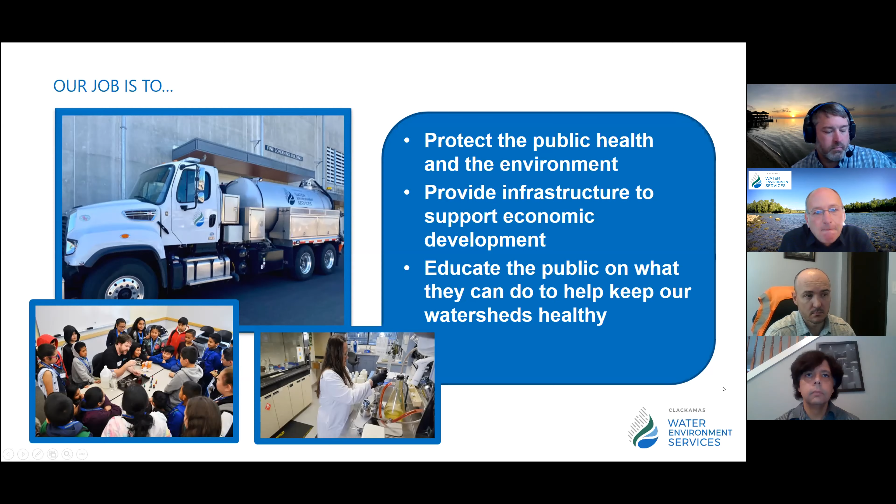The other cities that we serve, Milwaukie, West Linn, Oregon City, Gladstone, also own and operate those sewer pipes within their city boundaries. Combined, they own and operate over 400 miles of those underground sewage pipes, in addition to WES's 340 miles. Jeff is going to explain the significance of those many hundreds of miles of pipes for this project.

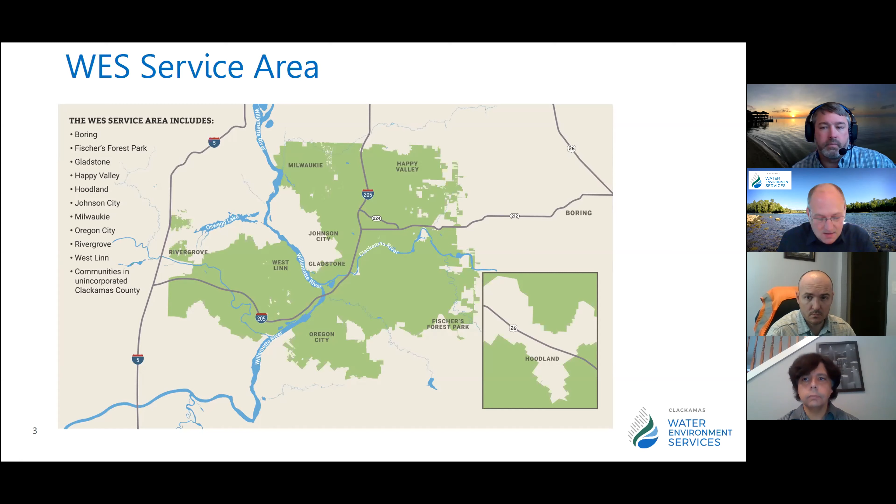Now I'd like to transition to really the main reason we're holding this open house. WES is asking for an easement to build a new effluent pipeline beneath Jon Storm Park in Oregon City. The Oregon City Charter requires a vote of the people in order to grant easements that are unrelated to park use. Our current outfall is nearing capacity during peak wet weather events in the wintertime. Our projections show that we need additional capacity by 2025, and that this project, if approved, will provide the needed capacity through the year 2080.

To be clear, an outfall is where our treated water enters the river. Outfalls are required to be designed to meet state and federal water quality standards for swimming, fishing, and aquatic resources. The proposed project, which is currently estimated at $21.5 million, would be funded as part of WES's current approved capital improvement plan. WES has the funding for this project. The proposed ballot measure, if passed, would not increase taxes. WES is asking for an easement to put an outfall pipeline under Jon Storm Park.

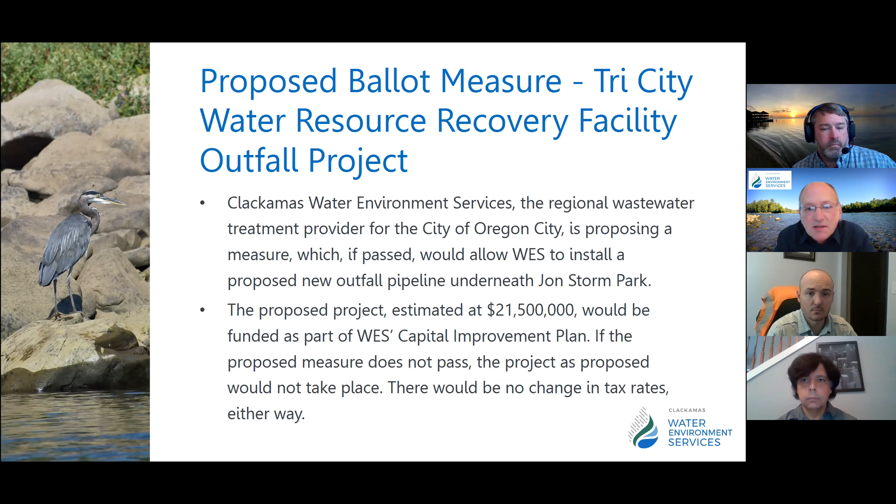If the proposed measure passes, WES will construct the outfall pipeline and restore Jon Storm Park to its original condition, and do park improvements recommended by the Oregon City Parks and Recreation Advisory Committee, a tree inventory, and mitigation of some hazardous trees. Any additional funding would be used for master planning for both Jon Storm and Clackamette parks.

If the proposed ballot measure doesn't pass, the project as proposed would not take place. Either way, tax rates would not change. And with that, I will hand it off to Jeff Stoller.

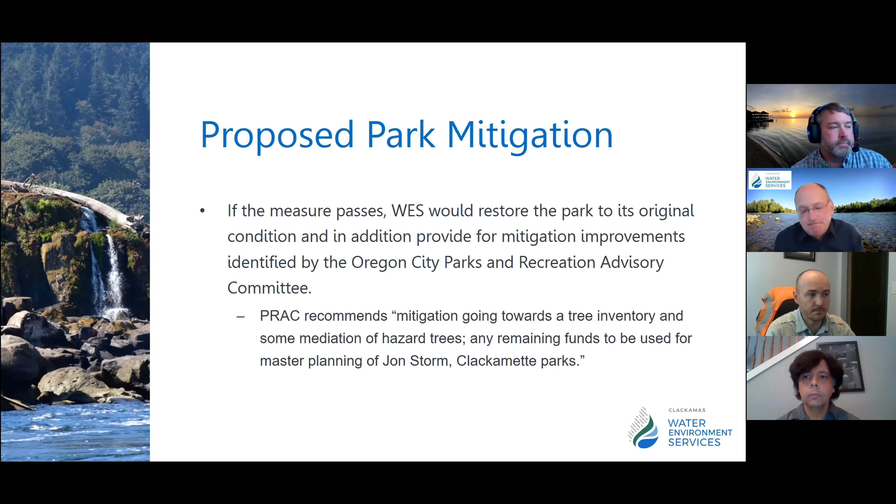Thank you, Greg. A little bit of background here on how we determined the need for the outfall.

In January of 2019, Clackamas Water Environment Services completed a sanitary sewer master planning project. The goal was to provide the district with a 20-year capital plan that outlines when and how we need to expand and maintain our sanitary sewer collection system to continue providing sewer service to our ratepayers.

To complete the master plan, the district placed flow meters throughout the collection system to obtain real flow data through an entire wet winter season. This data was then used to build a model to predict how future rain events will impact flows in the collection system.

I'd like to clarify that WES's collection system is a separate system, where sanitary sewers and storm sewers are not generally connected together. However, rainfall does have a big impact on flow in our system.

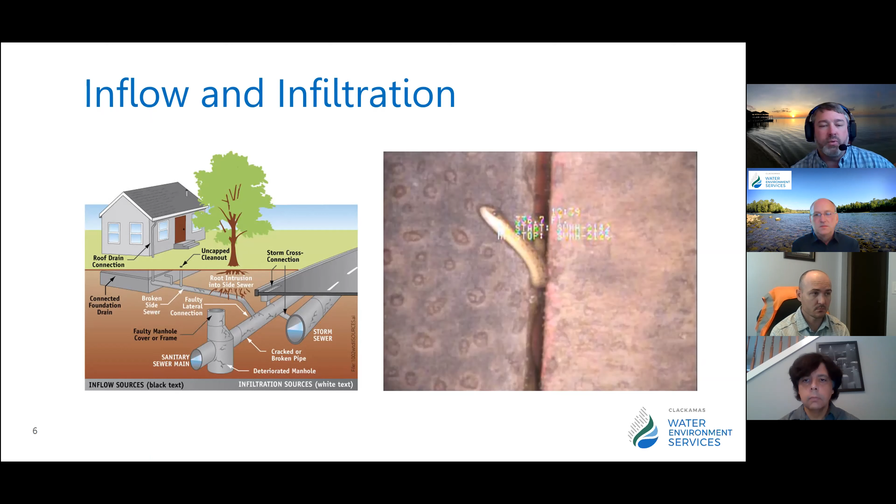Since WES is required to treat any water conveyed to our plants, preventing water from getting into our collection systems means less water we have to treat at our plants, which is beneficial.

During the collection system master planning project, an analysis was conducted to determine if it was more cost effective to just convey and treat all of that inflow and infiltration, or to make investments addressing the basins with significant inflow and infiltration to reduce them. The results showed it would save more than $200 million to make targeted investments in our collection system to address the inflow and infiltration.

All of the flow projections used for sizing our proposed outfall, as well as any future planning for the wastewater treatment facility, assume that WES and our member cities are successful in reducing the inflow and infiltration in these red basins.

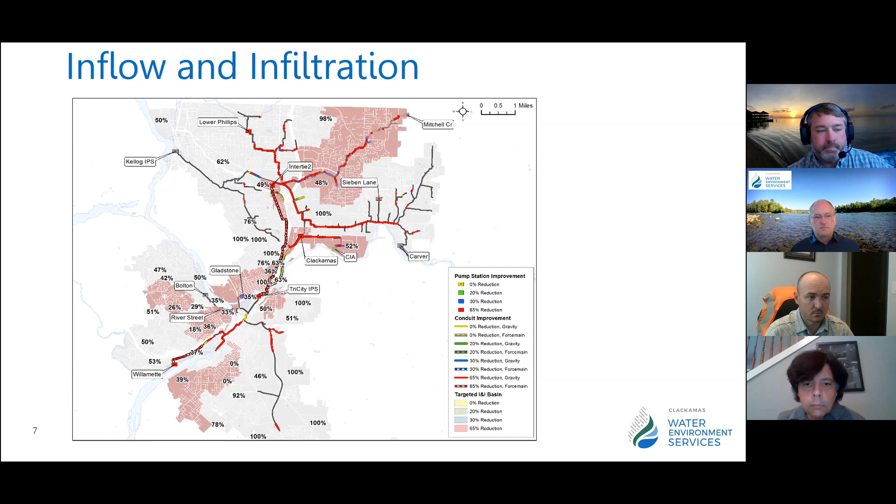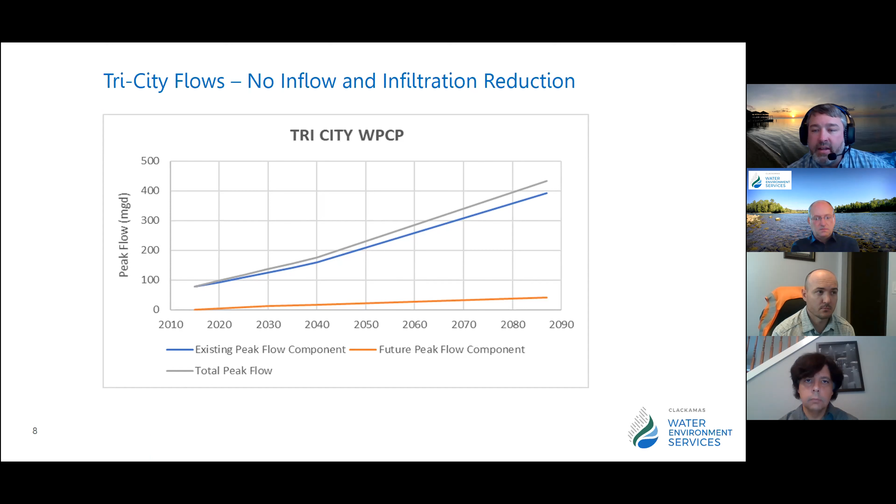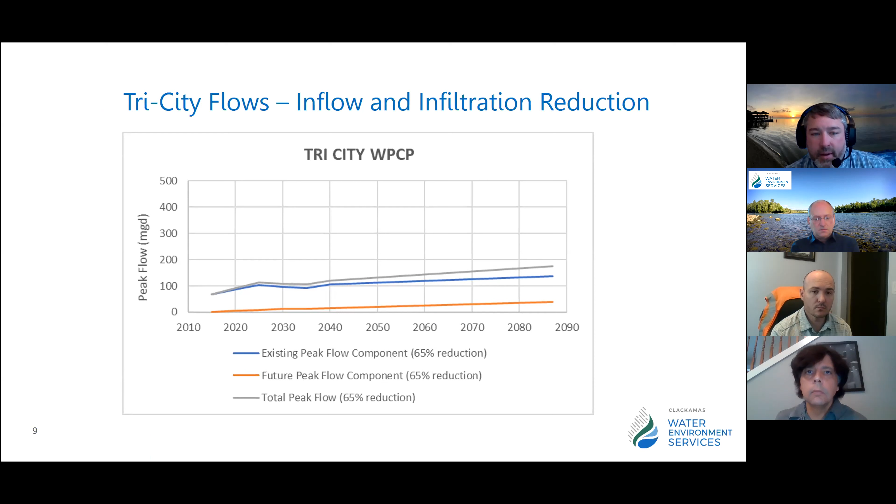Once the collection system master plan identified the peak flows to the treatment plant, WES began an outfall routing study to determine how we could get a new outfall from our treatment facility to the Willamette River.

I'll clarify that while the Tri-City plant is much closer and adjacent to the Clackamas River, DEQ has a 3-basin rule which does not allow any additional wastewater effluent pipelines to be permitted to the Clackamas River. So the proposed outfall routing study focused on going to the Willamette River, and the stretch of river was between just south of the I-205 bridge to the confluence of the Clackamas River.

The goal for placement of a diffuser in a river is a location that is as deep as possible, to provide as much time as possible for our effluent to mix, and a location with a very stable riverbed. We do not like sandy locations in the river that can bury our diffusers. We want to make sure that it does not change over time.

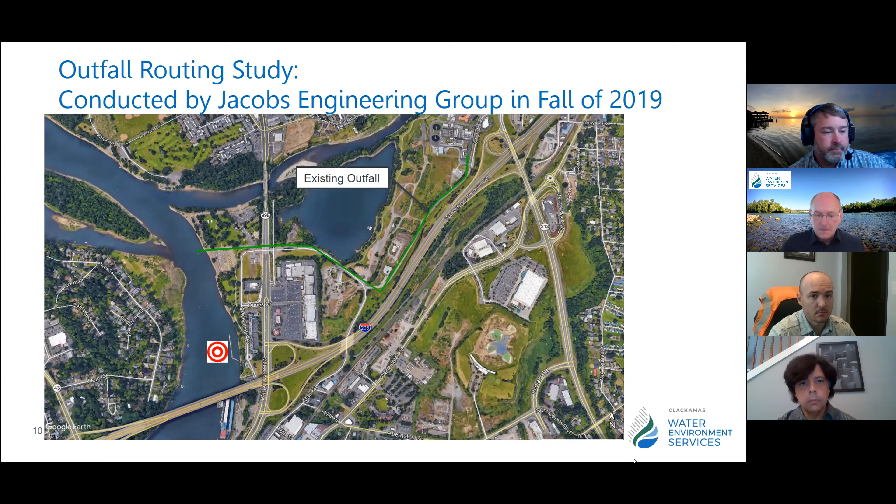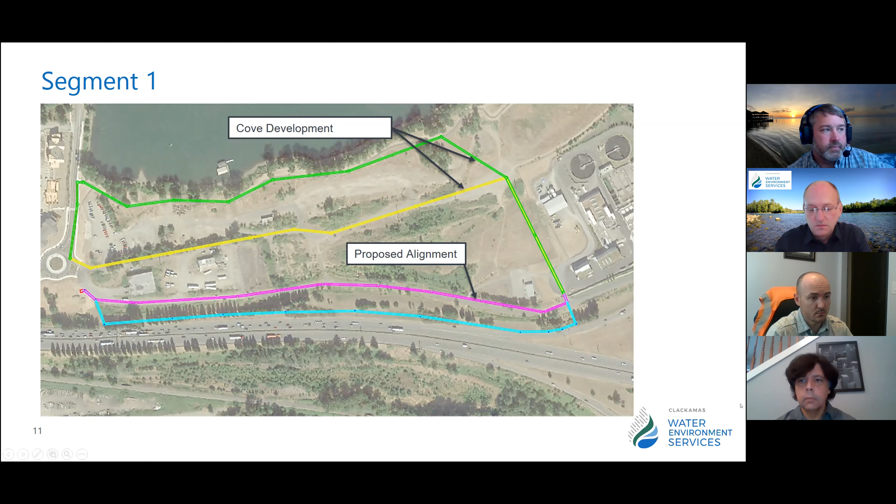The second segment takes us from the Main Street roundabout to the I-205 interchange adjacent to McLoughlin. WES has been fully coordinating with ODOT in developing these segments to ensure our project is well coordinated with the I-205 widening project. As this figure depicts, the magenta line is a much longer route which would require a bigger pipe. The proposed alignment for this section is the orange line on this figure.

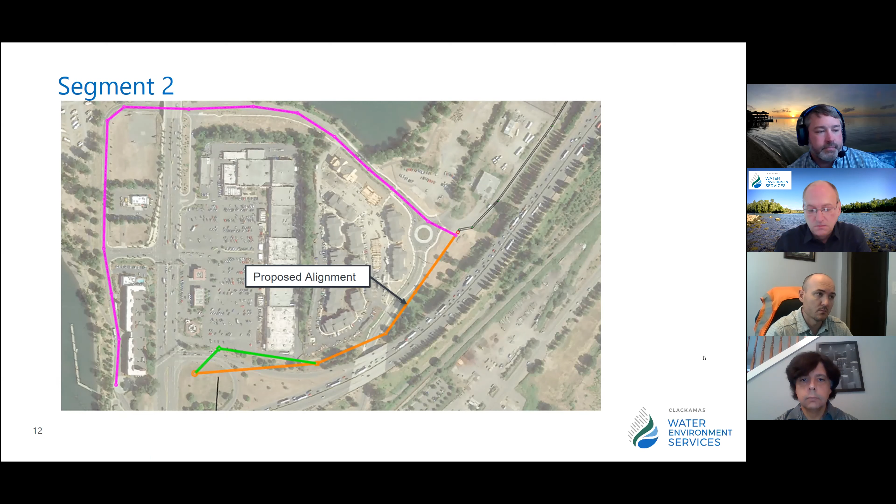The last portion evaluated was getting from the I-205 cloverleaf out to our proposed target in the river. We broke this out separately so we could have additional coordination with ODOT and the planned I-205 project, to see if we could potentially build this portion along with the I-205 bridge widening. While it was a possibility, ODOT does not currently have a firm schedule for construction, so WES has decided we will build our proposed project separately. We will continue ongoing coordination with ODOT to make sure we do not have any construction impacts.

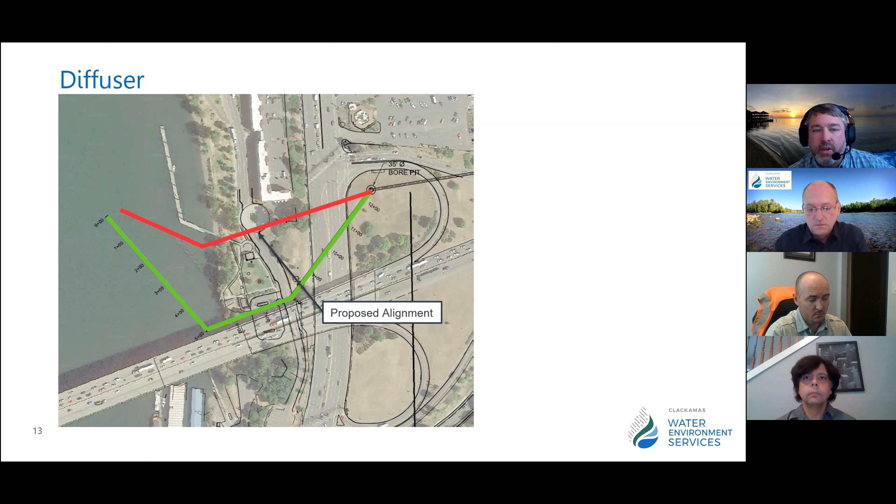At this time, we are collecting and evaluating the geology along our alignment to confirm that we can use our preferred tunneling approach to construct portions of our proposed outfall adjacent to the river.

So that is our path from our plant to the river. But let's take a look at this in a profile. WES is proposing to utilize a tunneling technique to construct portions of the proposed alignment. We are still evaluating the geotechnical information so we can identify an exact underground location suitable for tunneling.

If the measure is approved, WES would install a tunneling launch shaft in the I-205 cloverleaf and tunnel from that shaft in both directions, towards the river and back towards the plant. This will allow us to stay underneath the I-205 interchange on-ramps and avoid impacts to McLoughlin.

If the geology allows, we would drill all the way out into the river, then remove the drilling machine by floating it to the surface and onto a barge. This is known as a wet recovery. The proposed tunneling operation would reduce construction impacts to the public, reduce land disturbances, and mitigate potential disturbances to historical artifacts in the area.

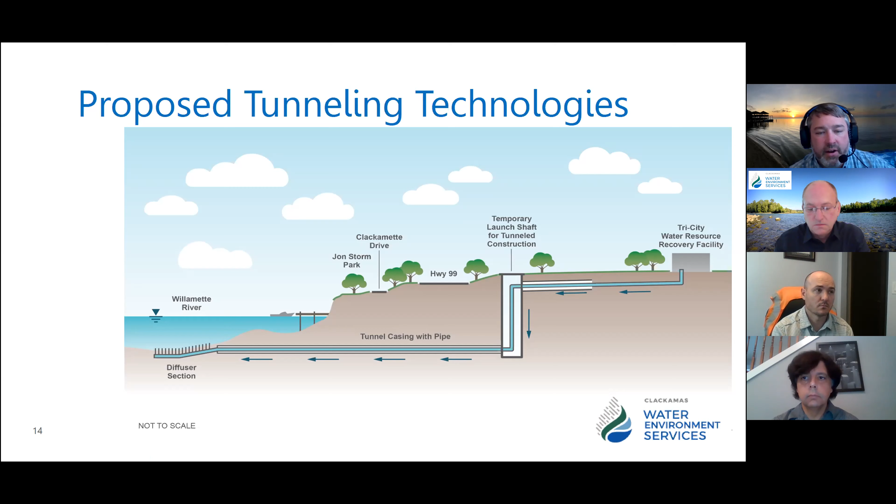Now that I've shared the proposed route to the river, I want to provide some clarity on what our proposed pipeline will actually look like. This figure shows how our proposed pipeline would be completely buried under the river. The portions that extend into the river flow are called diffuser ports. These diffuser ports are made of a very stiff rubber, similar to the consistency of a car tire, and create an underwater spray into the river.

Creating this spray underwater reduces the amount of time it takes for the effluent to become completely mixed into the river water, which is the goal. We anticipate approximately 20 diffuser ports will be needed along the pipeline segment under the river.

At many community meetings, we have been asked how would the proposed project affect fish, Pacific lamprey, wildlife, and habitat resources?

The proposed new outfall location would be upstream of the existing outfall, which is near a cold water refuge for migrating fish at the mouth of the Clackamas River. If this measure passes, WES would also deploy conservation measures to prevent impacts to seals and sea lions, which may be present if fish are abundant.

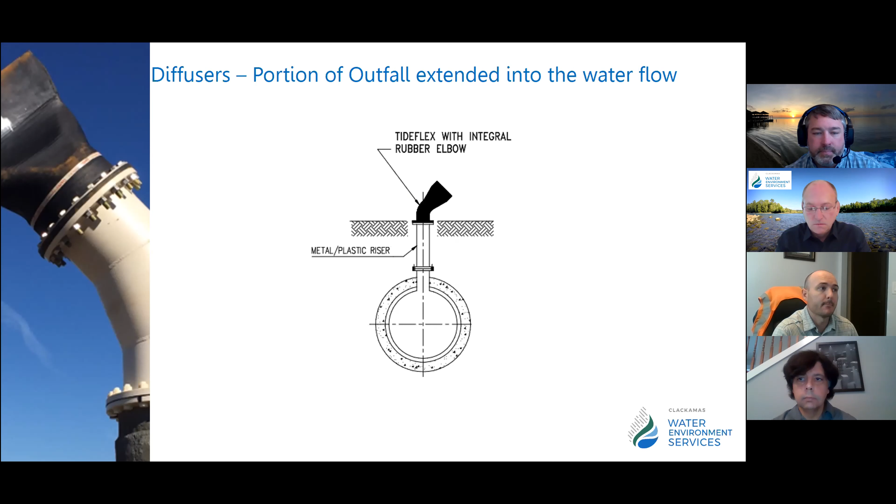The next steps for the proposed project focus on permitting and completing a design for construction. If the measure is approved, we anticipate needing more than 30 permits, which will take us over 2 years to acquire. This list of permits includes federal, state, and local permits, as well as archaeological related permits.

With this, I will turn it over to Dave Sheldon to dive a little deeper into where we are at on that specific archaeological process.

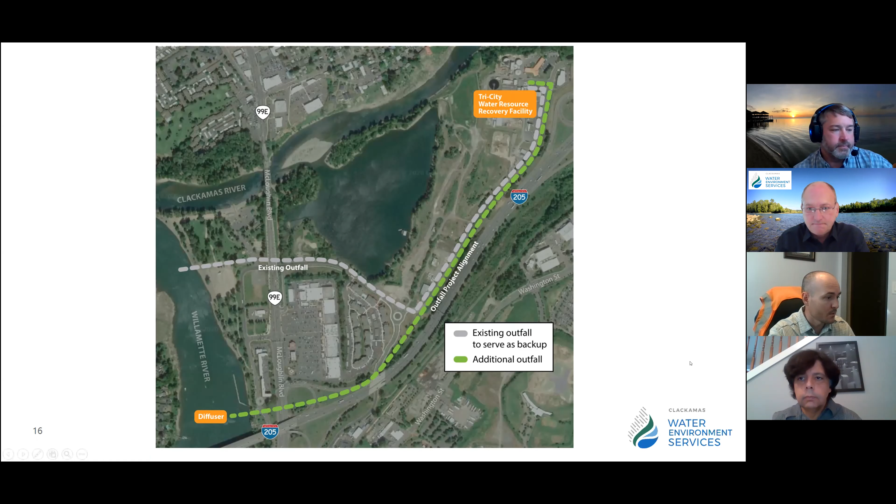Hello everyone, my name is Dave Sheldon. I'm an archaeologist with Jacobs Engineering Group. I've been involved in this project since the fall of 2019. My initial involvement in the early stages of the project was to conduct preliminary background research through the Oregon State Historic Preservation Office's database of known resources to help select alternative routes that will avoid or minimize impacts to known cultural resources. Additionally, I have conducted a preliminary reconnaissance surface survey of the proposed route and a site visit with potential stakeholders to discuss how potential impacts could be avoided or minimized.

Another aspect of my early involvement is to assist Wes in identifying the potential regulatory framework regarding cultural resources that the project must comply with if the proposed ballot measure passes. It is anticipated that the project will require a permit from the U.S. Army Corps of Engineers for the in-water work, which triggers a requirement that the project comply with Section 106 of the National Historic Preservation Act.

This Section 106 process is designed to guide the lead federal agencies through a process to assess an undertaking's effect on historic properties, which is a wonky term for important cultural resources ranging from pre-contact archaeological sites to historic houses. The process outlines steps to consult with stakeholders such as the state historic preservation offices and area tribes, identify historic properties, and work with stakeholders to minimize or mitigate impacts to these historic properties through avoidance measures.

If an archaeological resource cannot be avoided, an archaeological excavation permit will be acquired from the State Historic Preservation Office. The permit outlines work parameters to further explore site boundaries and characterize an archaeological resource through excavation.

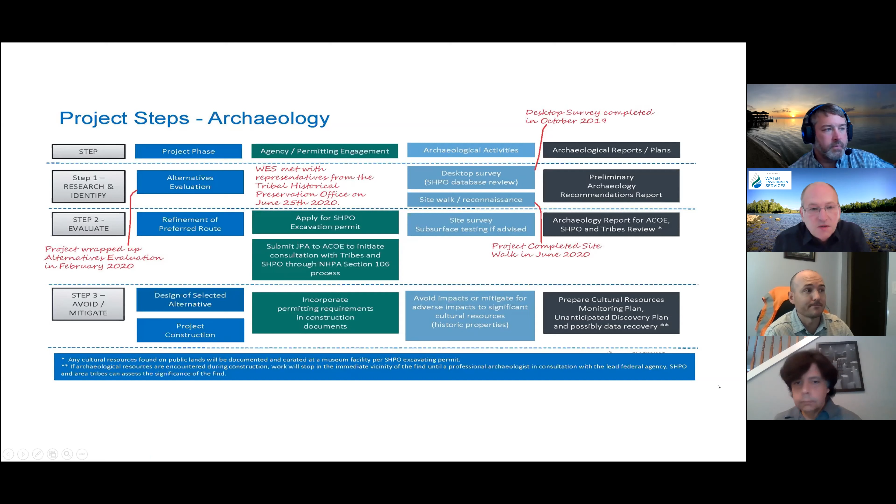All right, thank you, David. So folks, as you've heard, Wes is performing an archaeological investigation and working in compliance with the National Historic Preservation Act, as well as working with the Confederated Tribes of the Grand Ronde Historical Preservation Office.

Over the past months, we've been out talking to key stakeholders, civic groups like the Oregon City Rotary, chambers of commerce, environmental councils, as well as community and neighborhood leaders. We've also held walking tours, shared information through a number of media channels, and are holding virtual open houses just like the one you're attending today. Our goal is to make sure we are doing everything possible to educate the public on the proposed ballot measure and Outfall project and address any questions or concerns.